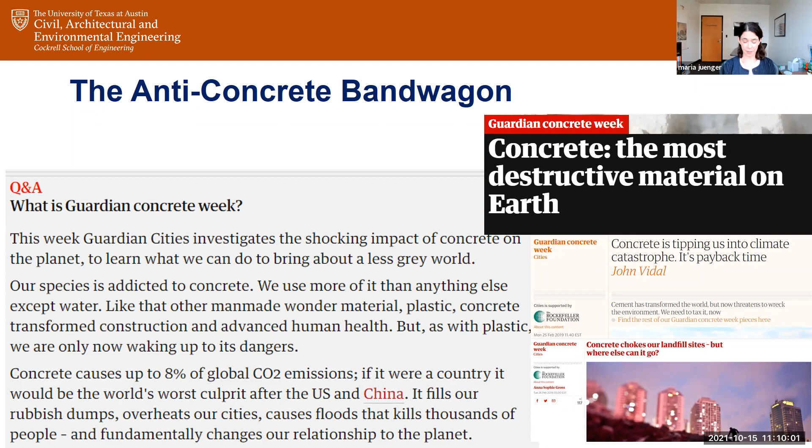And so I wanted to put that in context about the approach that he has. He's not the enemy of concrete. He is a supporter of concrete, coming from that perspective.

Microsoft is going carbon negative. Carbon neutral isn't enough for them. In conversations with the Portland Cement Association and Global Cement and Concrete Association, they will soon follow with these targets about carbon neutrality or carbon negativity. It's something that's coming, it's trendy, and everybody's jumping on this, I would say, positive bandwagon rather than a negative bandwagon.

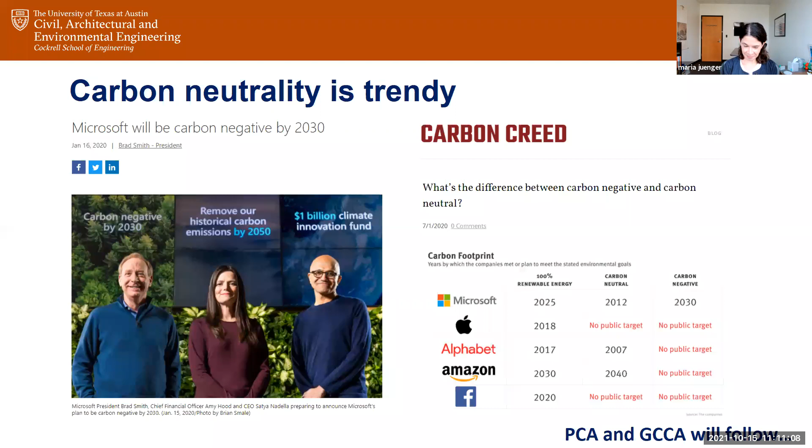I'm going to throw some statistics at you because I think they're fun. Many of you have seen these statistics before. Whenever I go into a talk that's about cement and concrete, people throw the same numbers at me and I say, oh yeah, I already know this, just keep going. But I'm throwing them at you because I'm picking the ones that I think are the most interesting and showing you those. So a lot of people talk about the amount of cement and concrete used globally.

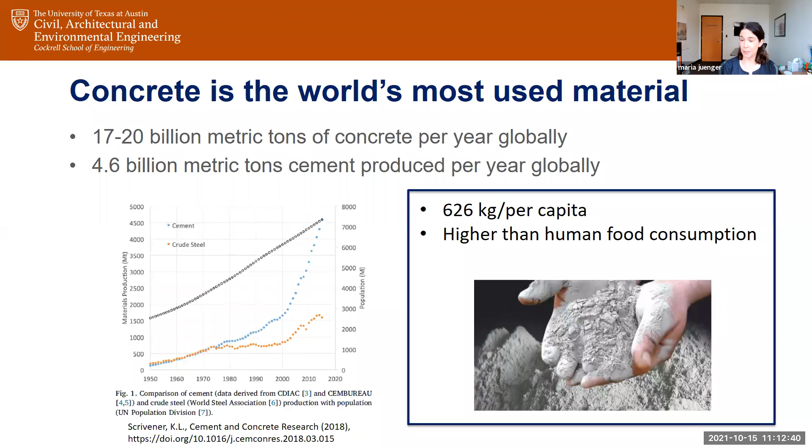So not only is it outpacing our population growth, we're actually making more cement than food. It'd be great if we could eat cement, but no, that's the one thing you can't do with it. You can make clothes, you can make buildings, you can make whatever you want, you just can't eat it.

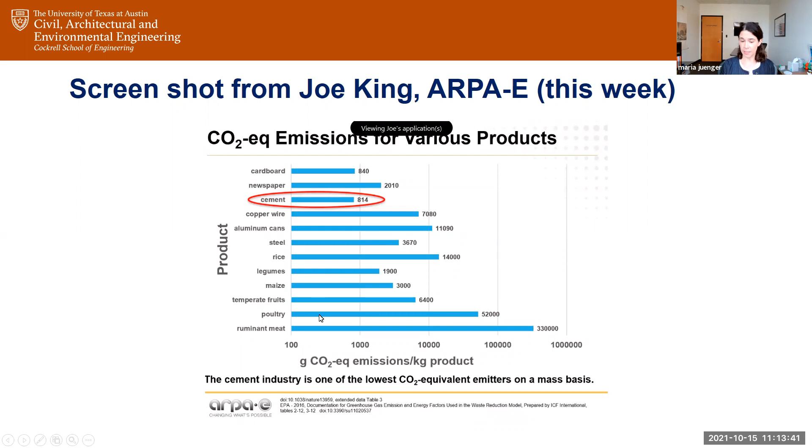It's carbon emissions, CO2 emissions for various products with cement circled. But what I think is interesting about this is on a per kilogram basis, food actually produces more CO2 than cement. We just make more cement than food. So the reason it's a target of this anti-concrete bandwagon is because we make more of it than we make food. But red meat, poultry, even some of the produce is producing more CO2 per kilogram than cement does. So I found that interesting, and so I stole it.

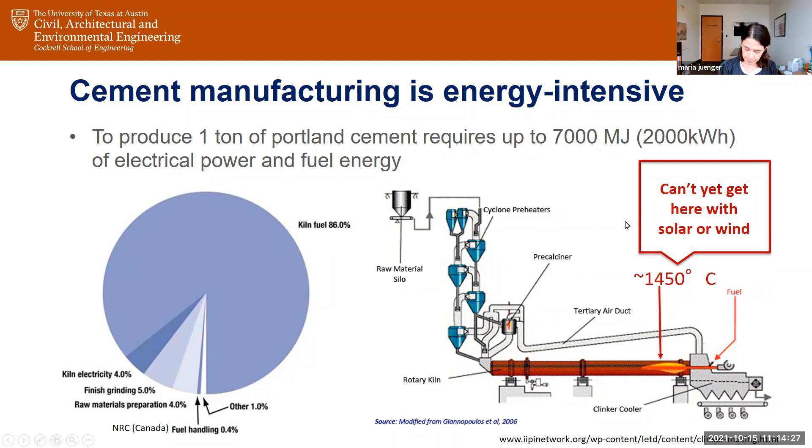Another statistic that people like to throw around, and I love this one, is that if the cement industry were a country, it would be the third largest emitter in the world behind China and the US. More than aviation fuel, not far behind global agriculture. I love that. I also tell people that Texas, if it were a country, would have one of the top 10 GDPs in the world, ahead of Canada and Korea. So in terms of context, these types of numbers ranking countries have a high impact, right? So it would be like a country.

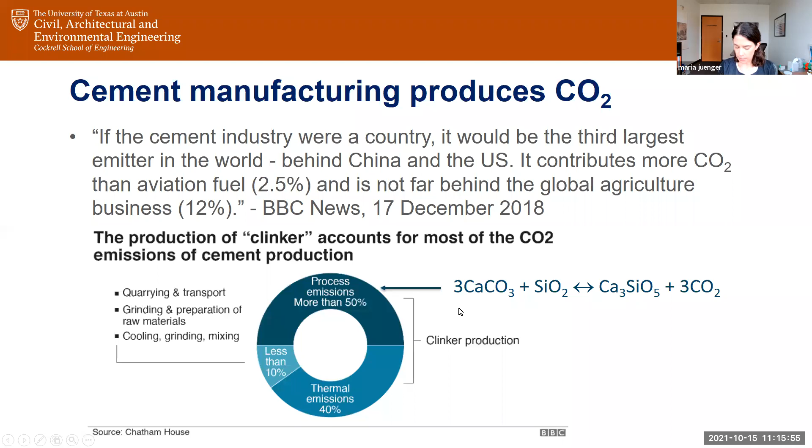The interesting thing about that is part of this equation is thermal emissions, which come from burning fossil fuels. But we have another problem: process emissions, or what I prefer to call chemical emissions, that happen when we put limestone, which is calcium carbonate, into our cement kilns. We release CO2 in that process, and we need that calcium carbonate because we need chemical phases like C3S, the Ca3SiO5, in our cement to make it react with water and gain strength. But CO2 is a byproduct of that chemical process that is hard to get rid of. So we're getting bad CO2 from the burning of fossil fuels and from the chemistry of the system. There are two approaches or two problems there.

The first lever is just making things more efficient. Can you change the equipment in the cement plant and make it more efficient? The second one is, can we use alternative fuels? Do we have to be burning fossil fuels, or can we use something else? And I'm dividing that into equipment, because if you're burning something else, you need different equipment to burn it.

And you also need to change your manufacturing process. So I'm defining it as equipment changes and the way you manufacture and process the system.

The third has to do with the chemistry of the system, what we call clinker substitution. Clinker is what comes out of the cement kiln. If we substitute that cement with something else, we can reduce CO2 emissions because we're using less cement. So really this is a material change. We can substitute it with either a completely alternative cement, or with what we call a supplementary cementitious material, which is a partial substitute of cement. That's a material change, changing the chemistry of the system altogether to reduce cement use.

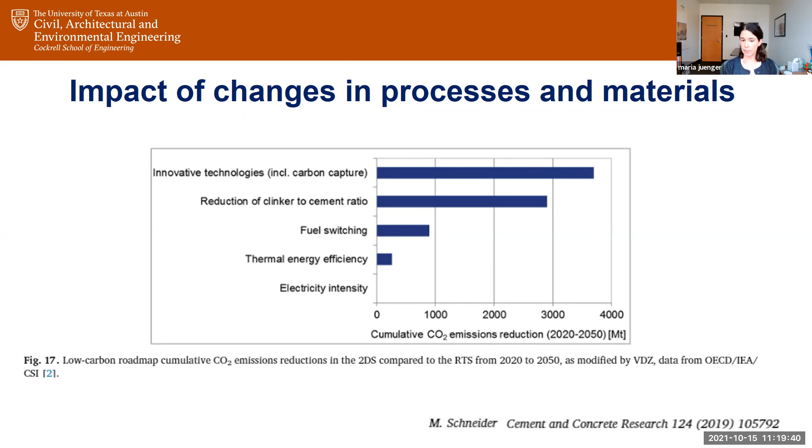In those original topics, one reason Bill Gates focuses on carbon capture is because it actually has some of the most power to reduce CO2 emissions from the industry. Innovative technologies, including carbon capture, can cumulatively reduce millions of tons of CO2 from the cement industry. Clinker reduction is the second best option for removing CO2 by pure volume or mass reduction. Switching to alternative fuels is next, and then thermal and energy efficiency and other electric changes are lower, but really small compared to the others.

In this particular talk, I'm going to focus on the middle three topics. Thermal and electric efficiency is useful, but has a really small impact. Efficiency of material use is really, really useful, but it's outside the scope of what I'm going to talk about here. I'm going to talk about the middle three, which have the most power to change our industry.

The one in bold is the one I'm going to talk about the most, and I'll tell you why. Not just because it's my favorite, but because if we think about what we have the power to do as civil engineers, I talk about this quite a bit in my classes when we discuss steel versus concrete. When I teach my undergraduate students about steel, I tell them steel is great and here's how it works. I tell you this so that when you design something made out of steel, you make a good and reasonable choice of which steel to use, but you do not make the steel.

On the other hand, concrete, civil engineers design and make the concrete. It's our job to design and make concrete. It is not our job to make steel. The metallurgists make the steel, we use it.

The same thing is true when you look at these levers. From an alternative fuel perspective, this isn't really a topic that falls under the purview of civil engineers. It's much more of an industrial, mechanical, chemical engineer type thing—it's about changing the fuel you burn in a process. So I'll talk about it, but it's not something we really can do research on. We can do research on the impact on the material after it's been done, but not on the fuel changing itself. The same applies to certain parts of the carbon capture and storage equation. Civil engineers use the material that comes out.

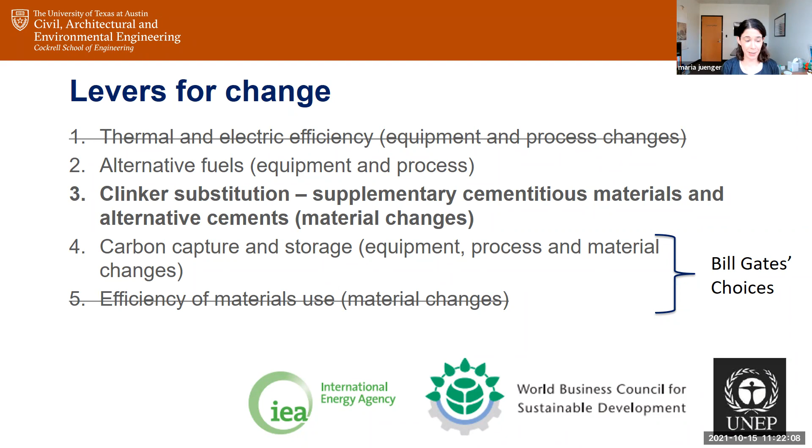So this is in bold, not just because I like it and do research in this area, but this is the one topic that we have the most power over, and five. But again, I don't have a lot to say in that area of my own work, so that's why I'm not talking about it.

Okay, so let's talk briefly about alternative fuels, just so you have a good sense of what's happening here and what people mean. In terms of alternative fuels, people generally burn coal, oil, or gas to fire the cement kiln to that 1450-ish temperature that's necessary. There's a lot of other materials you can use: sewage sludge, animal bone meal, used tires, solvents, plastics. There's a lot of waste materials people are burning, but if you look at this entire list, all of it is still burning, which means there's still emissions associated with it.

They may be byproducts of other industries, but they're still burning. One of the things I want to mention is you are changing the equation with respect to CO2 emissions for sure, but there are side effects of this. I mentioned I can't study what's going to happen in a cement plant to the temperature when you burn a different fuel. But for example, for many years, this concept of animal bone meal, people have been using animal bone meal in cement kilns and burning this waste animal product for decades.

One of the things they noticed pretty early on, which was really interesting, is that when you burn any waste - but in the particular original studies, when you burned bone meal - there was a lot of phosphorus in the bone meal that would be released from the burning and get into the cement itself. So we can't study what the materials are that you would burn, but we can understand the impact of burning that material on the cement itself and how that affects its performance. Because of the way the system is designed in a cement kiln, particulate matter can rise up from the combustion chamber and mix itself in with the cement, which is interesting.

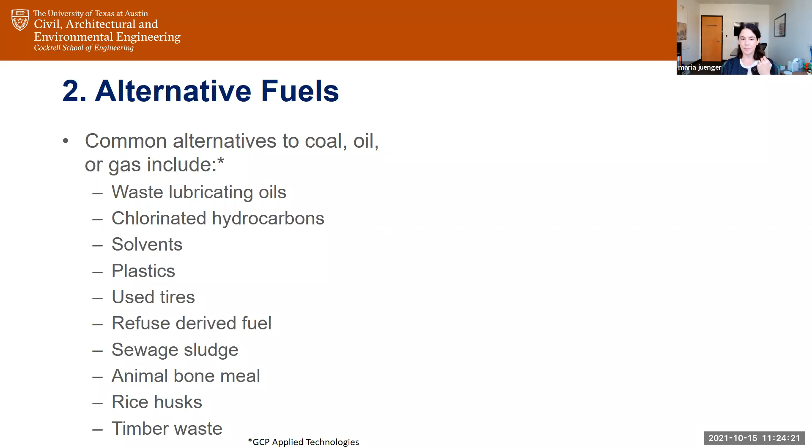So also, in January this past year, 2021, I was preparing another talk and I was looking at these types of concepts and I did a bunch of Google searches. And you know how I said you can't really use solar or wind, it doesn't have high enough energy? Turns out people are actually looking at this, which is super, super cool. There may be ways to actually take advantage of solar energy and these solar fuel technologies to actually produce enough heat to fire a cement kiln. CEMEX, in a press release from 2020, is saying that they're looking into this. So it may be possible, just not with the technology that we commonly have and commonly use today.

About a month ago, we installed solar panels on our roof. I'm telling you, those solar panels will charge our electric cars and run our excessive air conditioning that we use in Austin, Texas. They're doing a really good job at that. But they are completely not capable, not the right technology to take a cement kiln to 1450 degrees. We're not there yet.

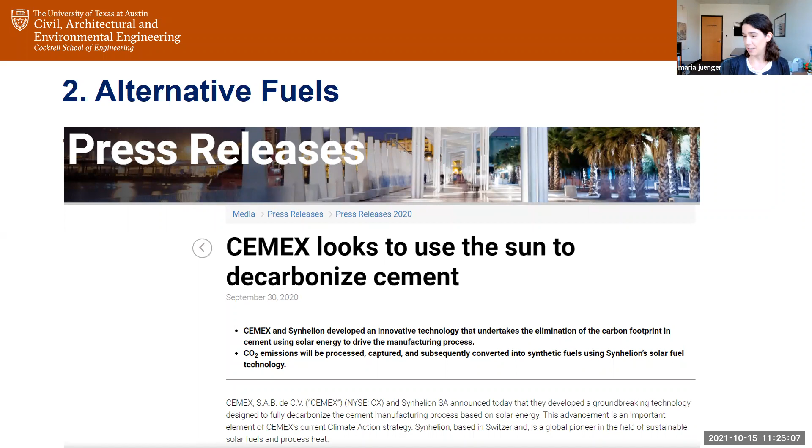Okay, let's talk about - I'm going to dive a little deeply now into this concept of clinker substitution, since this is the area that many of us work on in concrete materials. So I'm dividing clinker substitution into two different types of concepts. There's a concept of still using Portland cement, but replacing a portion of it so you use less of it. And then there's a concept of forgetting Portland cement, using something else entirely. So what we're calling these is 3A, since we had 1, 2, 3, 4, 5 levers. This is lever number 3.

3A is clinker substitution using a supplementary cementitious material, and that's the technical term for it. And then we'll talk about 3B, which is get rid of, don't use Portland cement, use something else entirely - so basically 100% clinker substitution. In this case, we're talking about 10, 20, 30, 40, 50% of the cement being replaced. Okay, so admittedly, using supplementary cementitious materials is not a new idea.

This has been done for decades, and more than 60% of ready-mix concrete in the US already uses this. So in terms of impact on how we make and produce our concrete and how it performs, this is already part of our strategy. Originally, it was a strategy to reduce cost and improve concrete durability, but now people are targeting the impact on sustainability. So this strategy isn't new, it's already being used. The research challenges are multiple, but one is that the supply chain is changing rapidly for these types of materials.

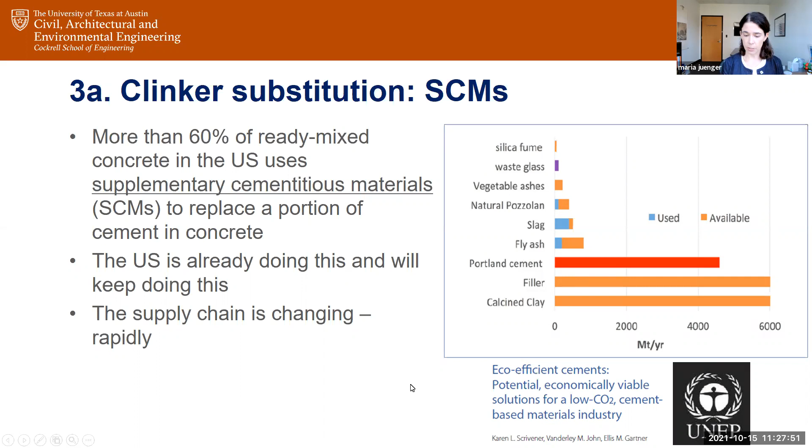The question then becomes, can we push it even further down the line? Can we start using gypsum? Can we start using asphalt? Can we start using other things? The answer is you have to use something that is chemically compatible with the system and gives you the performance you want. You're trying not to just dilute your cement - that's easy enough to do. You can dilute cement with anything.

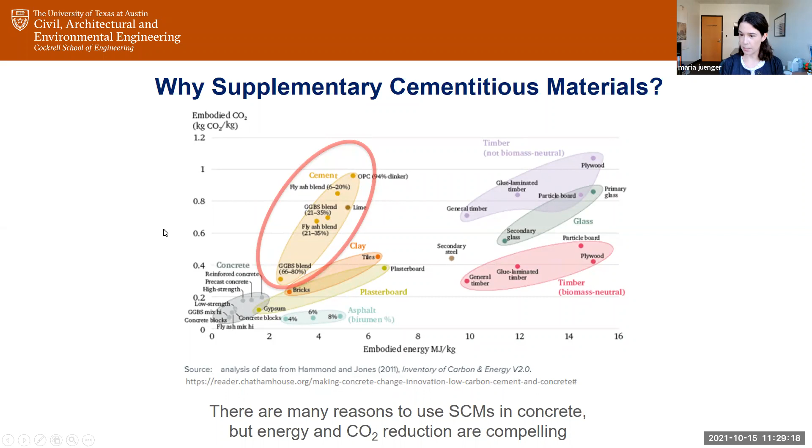You can dilute the cement with anything. What we're doing here is trying to put something into our system that's actually chemically reactive, so that we improve the properties of our system, or at least keep the status quo. So we can't just look at anything - so what are we looking for?

In terms of what we're looking for, there are several qualities. We want a material that's primarily glassy, that either comes as a fine powder from its source or can be ground into a fine powder - so it kind of looks like cement. And from a chemical perspective, we want something with a high silica content and alumina content. We want it to have a high surface area so it can dissolve in our cementitious pore solution, so we want it to be fine and have a high surface area. We also want it to have a high amorphous content so that it can dissolve in our cement pore solution as well - we want something that's soluble, that will be reactive.

The reason we want this is we want it to react in what we call the pozzolanic reaction with calcium hydroxide formed from our Portland cement, so that it forms this calcium silicate hydrate phase, which gives us strength and durability in our concrete. And we want all of this at a low cost. So we want everything - and the question is, how do we get that? We want everything, and we also want it to be low energy, low CO2. So it's a lot to ask for in a material.

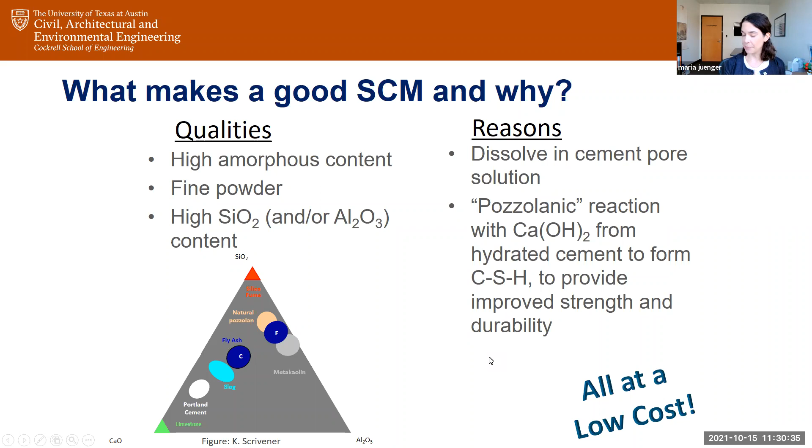Historically, in the US in particular, fly ash met all of those criteria. Fly ash is a byproduct from burning coal for power, so it met all of those criteria. It was an amorphous material, mostly glassy, high in silica and alumina. It already came as a fine powder, you didn't need to grind it. It was a byproduct from another industry, so in terms of embodied CO2 and embodied energy, it was doing pretty well from that.

If we want to get from 60% of our concrete uses supplementary cementitious materials to 100%, and we want to use more of it, we need to look for and identify other materials that meet those needs. What I would say is, in this search, what we're looking for is performance. How good is the material? And what I will say is, we don't need it to be great, we need it to be just good enough. I'll get back to that.

Cost. We're not looking for something at this point in the technical market that's super cheap. Fly ash was cheap because it was a waste product historically. We're looking for something that is more or less the cost of cement, maybe slightly higher, slightly lower, but at least it's going to be cheaper than carbon capture. So we need to kind of temper our expectations for these types of materials.

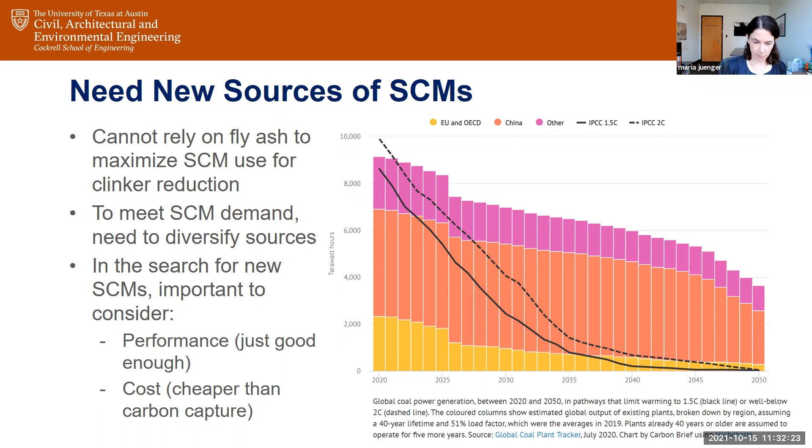One of the really good candidates of materials that we can use as supplementary cementitious materials are natural pozzolans. These are volcanic materials like pumice and perlite, volcanic ashes, zeolites, similar in many ways to what the Romans used in their concrete mixtures. And then sedimentary pozzolans, so calcined clays and shales that don't simply have to be quarried, but need to be heated, or what we call calcined, at a high temperature in addition to being quarried.

One of the interesting things about these materials is that, whereas fly ash is decreasing in availability, the current commercial availability of these natural pozzolans is actually increasing. But because you need, in many cases, a volcano somewhere nearby geographically to have deposited the volcanic minerals, they can be really limited geographically, but not in all cases.

What I'm particularly interested in looking at, and we're going to talk about some case studies, is how can we take these materials that inherently have lower CO2 and embodied energy than Portland cement because they're simply quarried or heated to a lower temperature, and combine them with our interest in using waste products like we did for fly ash as well. Then how can we blend them and optimize them to make them meet our expectations in terms of having a relatively low cost and just good enough performance? So I'm going to talk about that with a few case studies.

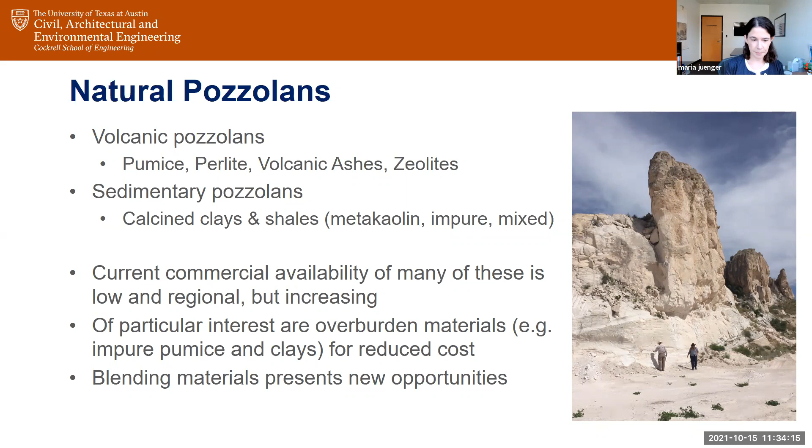So when we're looking at finding supplementary cementitious materials, our gold standard is fly ash. But what's great about having fly ash as a gold standard is it's not actually a great material, it's kind of a mediocre performer. In terms of reactivity, it's only 20 to 40% reactive. The reactivity compared to many other materials we're interested in as supplementary cementitious materials is more or less average to low.

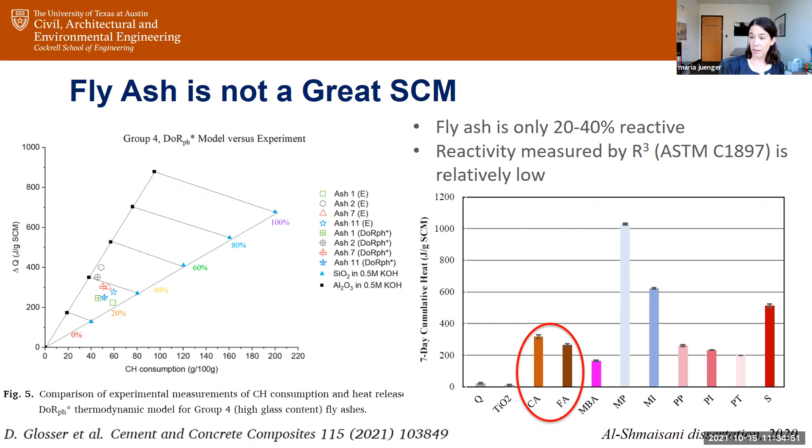So when we're talking about a substitute for something, at least we're not aiming really high. We're aiming for something that's relatively mediocre, which is good to know. If we're assuming fly ash is a reference SCM, we don't really need great performance, we need just good enough performance. Actually, it's better for reducing the amount of cement in your system to use a high amount of mediocre material than a very small amount of really good material. So in terms of balancing and materials design, it makes a lot of sense.

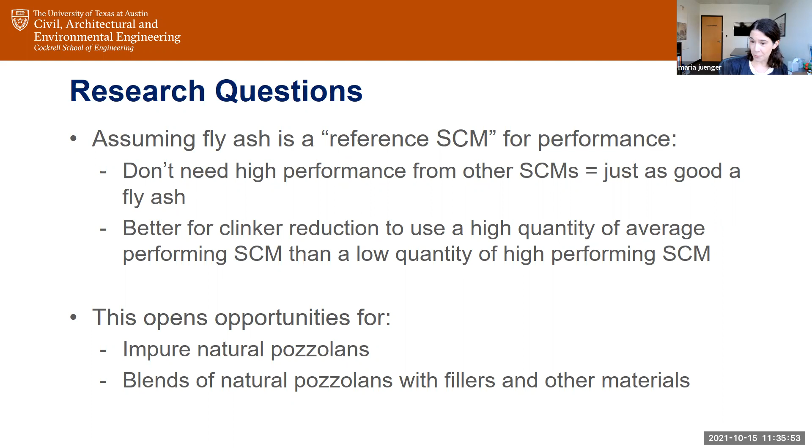This opens up opportunities for using what we would say less desirable natural pozzolans, or blends of materials, to target a performance and cost perspective. So designing the system to be average. It's really counterintuitive, you usually want to design something to be optimal. We want to design it so that we can use it cheaply, abundantly, and get okay performance out of it. So the first example I want to give of a case study here is what I would call impure pumice.

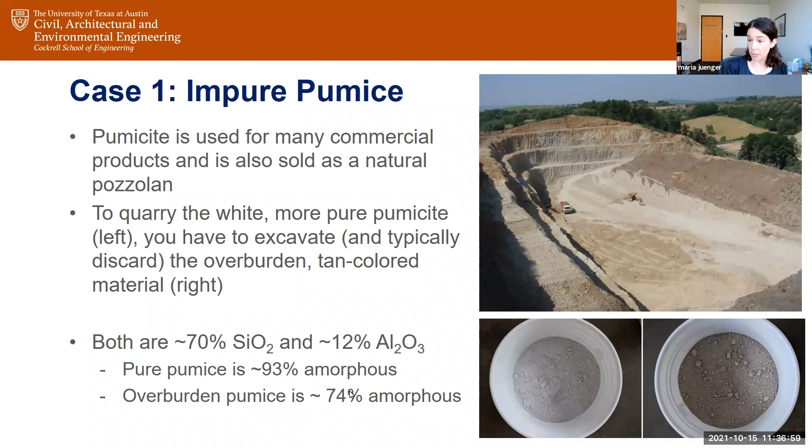The pure pumice is really amorphous, the overburden pumice is less so, the tan pumice is less so. What we're interested in knowing for the concrete industry is whether the tan pumice, the stuff they're really just throwing away, can we use that? Can we use your garbage and get just as good of performance, or close enough, to the more pure material that you're selling to other industries? The answer is, I'm going to show you a couple of quick examples of data.

This particular test is a reactivity test now standardized in ASTM C1897, called the R3 test. In this plot, which I'll show a few times with different circles looking at different materials: if we look at something inert, like quartz or titanium dioxide, this value is low. If we look at fly ash, this value is medium. If we look at pumice, the pure pumice (PP) or the impure pumice (PI), this overburden pumice, their reactivity in this test is about the same as fly ash. So they both actually meet our goal of being just as good as fly ash, and yet the impure one is a waste product, just like fly ash as well.

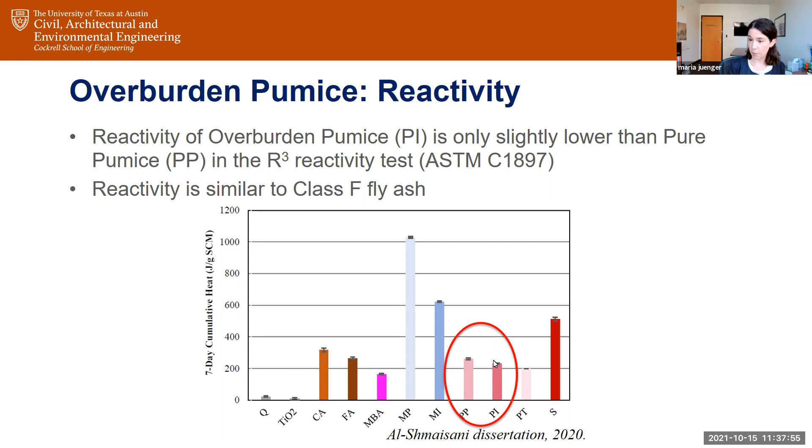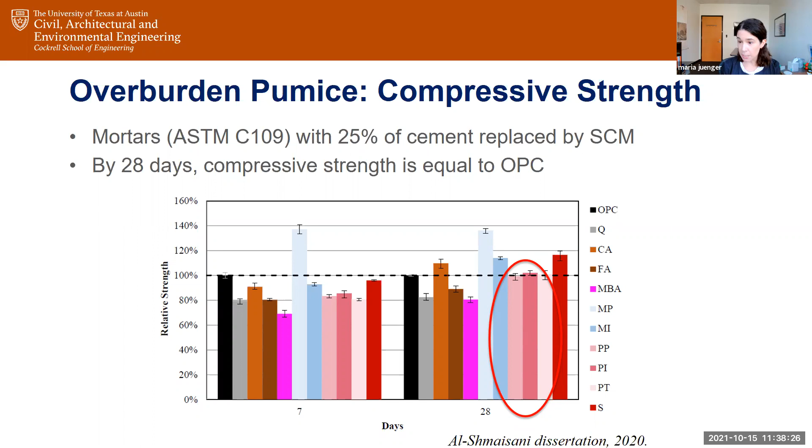In terms of compressive strength, another metric people are interested in, these are 28-day strength values. This black one is at 100% relative strength compared to Portland cement. These overburden pumice materials have the same compressive strength as Portland cement. So in terms of being able to replace fly ash with this, and make concrete with this, it's a good material — you don't need to use the more pure one.

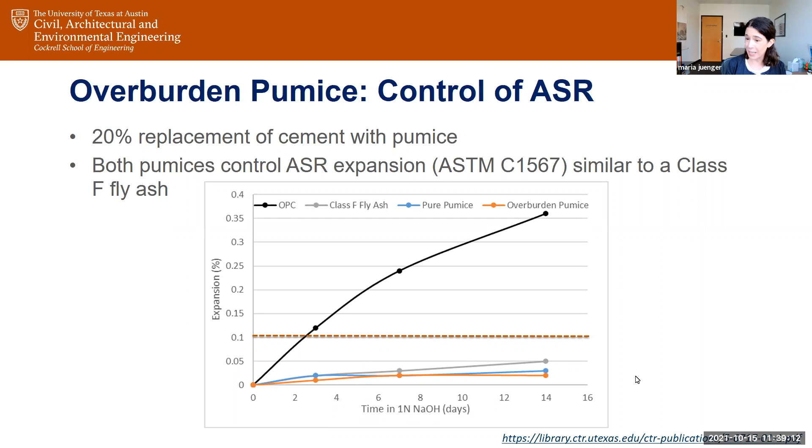Another example of what people look for in supplementary cementitious materials is how they help concrete durability. In this example, for alkali silica reaction, a reaction that causes expansion and cracking in concrete, with Portland cement alone you get high expansion over time on your y-axis. But when you replace Portland cement with pumice or fly ash, they all reduce expansion. The pumices perform quite similarly to the fly ash, even the overburden material. This proves the concrete industry can take the rejects from other industries quite easily and doesn't have to use their more pure products.

Another similar example is clay. Clay is abundant around the world, and typically in concrete mixtures we've used a very purified form of kaolinite clay that's been heated, called metakaolin. We typically use it in really small amounts because it negatively impacts workability and can have a really high cost. But there's increased interest in using clays at greater amounts as substitutes for fly ash, in which case you can start looking at clays that are less pure and what the impacts of those materials are in the system.

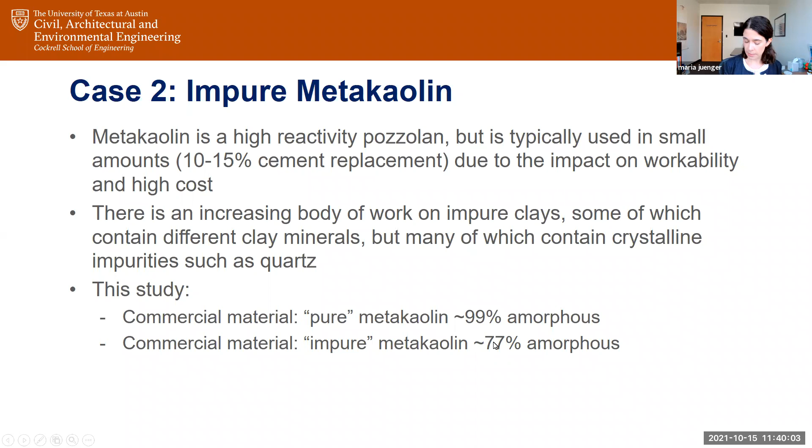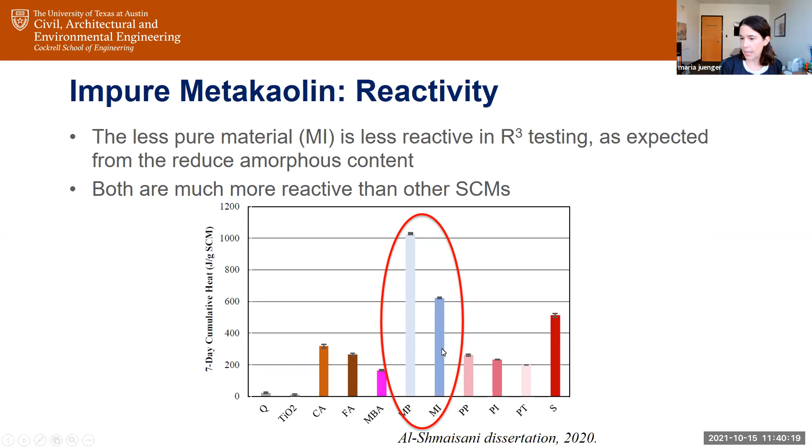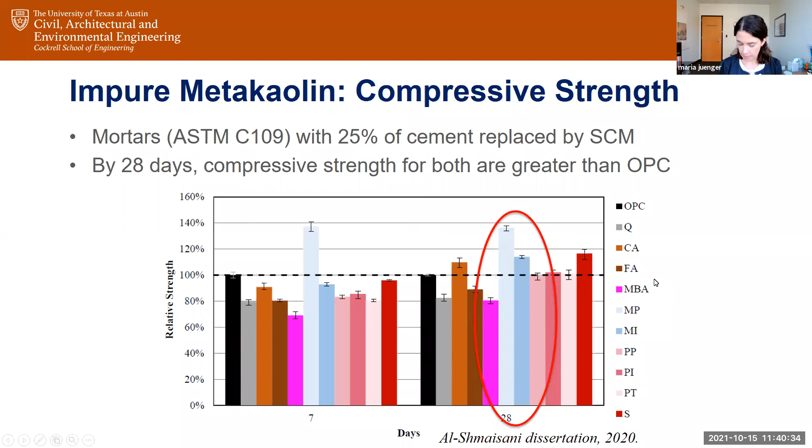In this study, we're comparing a really pure metakaolin clay, 99%, with one that's more like 77% amorphous and has contaminants in it. If we look at reactivity, both are significantly higher than the fly ash. The reactivity of the less pure material is lower than the really good one, but since it's still better than the fly ash, it's suitable for our concrete mixtures. In terms of compressive strength, the strength is great as well. Reducing the quality doesn't necessarily make it a worse product for our concrete mixtures, and in some cases could actually make it better. One of the problems with metakaolin is that, as I mentioned, you use it in really small amounts because it's really expensive and it really increases the water demand of the concrete mixture.

So it makes it really stiff and hard to mix, and sticky, so people use it in really small amounts, let's say 10%. What we found is that when you use a less pure calcined clay, you can get workability similar to other pozzolans.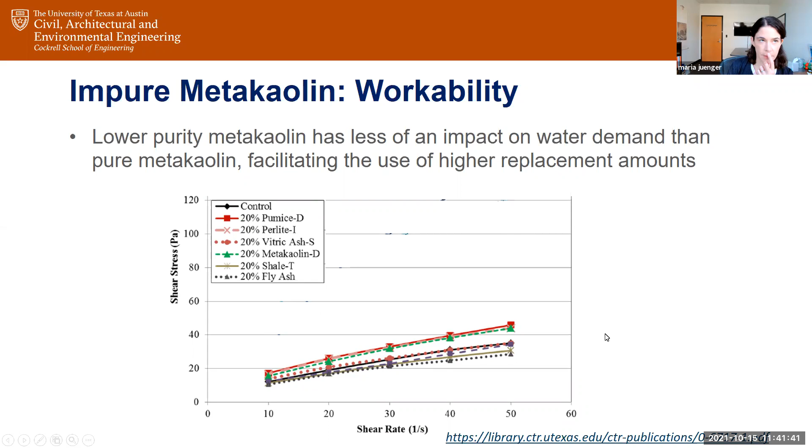In this particular example, these are rheology plots of shear stress versus shear rate, where the slope gives you some indication of viscosity. The black line is just a Portland cement mixture, and the metakaolin is this green one, which has a slightly higher viscosity, but still within what's reasonable for a concrete mixture. Whereas pure metakaolin, which I don't have on this plot but we do have data for, is a much, much lower viscosity mixture. Sorry, lower viscosity, higher—I always get mixed up with that. I have to think about syrup.

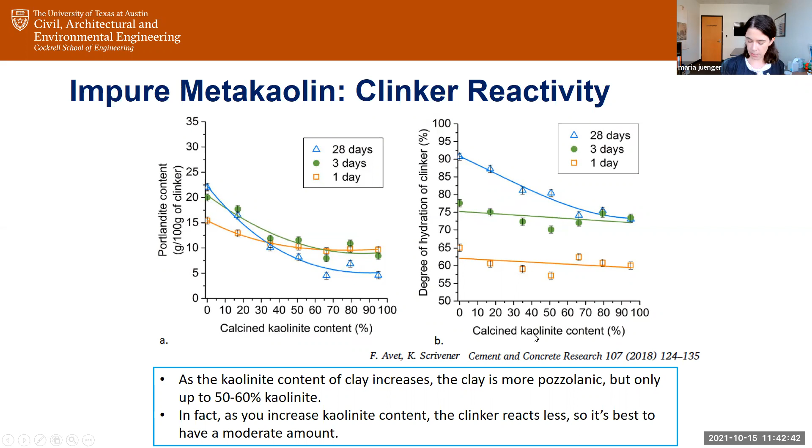The other thing that's interesting is if you start using these less pure materials—again, this is counterintuitive, you think you want to use the best—but there's so much literature and data out there that says let's aim for mediocre. This is an example from a study in Switzerland from 2018 that basically says as you increase the kaolinite content of a calcined clay, so you increase that amorphous content effectively, you actually decrease the reactivity of the cement itself. So they're competing. So really what you want is a calcined clay that's about 50 to 60% amorphous, or 50 to 60% kaolinite, because you can get the optimal reactivity of your Portland cement and yet use a cheaper, better, just as good for your properties calcined clay. So there's a lot of really interesting material optimization happening here.

Okay, my third case study, which is pretty short I promise, is kind of a case study in 'be careful what you ask for.'

We really are interested in looking at byproduct materials for our supplementary cementitious materials because we want things that are low cost. An example of this in the US: most of the shingles used on roofs are these asphalt composite shingles, where you have an asphalt binder and really uniformly graded small aggregate blended with this asphalt binder, put on a sheet of paper and tacked onto the roof. In Miami you might have more clay tile roofs and it might be much nicer, but the rest of us end up with these composite asphalt shingles.

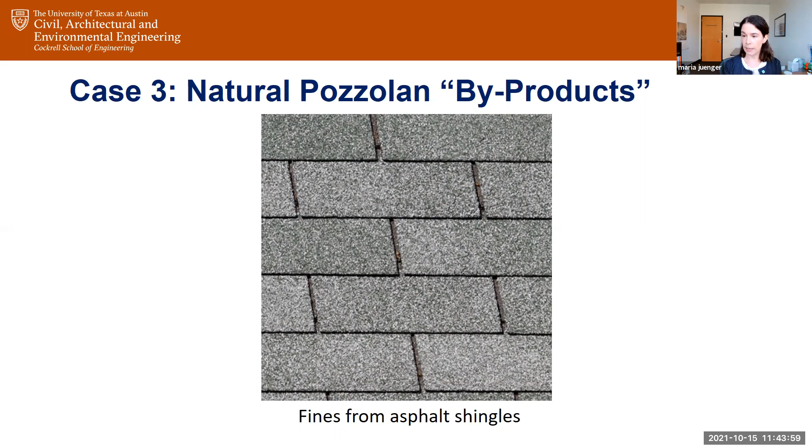These fines are interesting. Like we know from making concrete aggregates, if we're quarrying, say, a limestone aggregate, we know we have to quarry it and crush it, and in the process of crushing we end up with a lot of fine material that we consider waste. Same for this process—they're looking for a specific particle size range, so anything smaller than that is a waste byproduct of their industry. What's interesting is some of those particular aggregates have silica and alumina in them, so they could presumably be really good supplementary cementitious materials.

If you start looking at the 28-day strength of, in this case, a mortar made with these materials—this black one here is the Portland cement. These materials NM1, 2, 3, and 4 are the byproduct asphalt shingle aggregates, ground very fine in the same particle size as Portland cement. The P1 and P2 here are actually the pumices we looked at earlier. If you look at the 28-day strength, they look great—you think, oh, we've got a really great source of supplementary cementitious materials as a byproduct of these industries. It seems to not affect 28-day strength at all.

However, if you start looking at later strengths, it tells another story and starts to raise suspicion. If you look at the Portland cement, you have a 90-day strength here of a little over 6,000 PSI, let's say 42 megapascals, and the pure pumice is even higher. The impure pumice is the same as the Portland cement, but you start looking at these others and they never caught up. So it starts to raise suspicion—they're not behaving like the pumices, they're not behaving like a supplementary cementitious material, they're behaving a lot more like the inert quartz. So the question is, why?

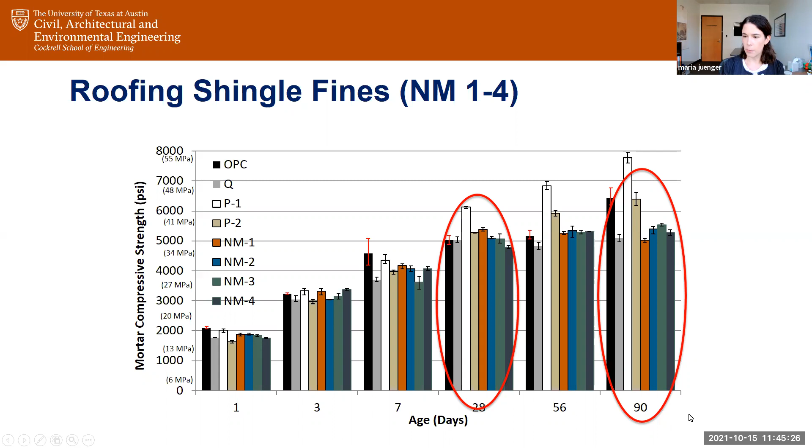If we look at reactivity tests, this ASTM C1897 R3-type test starts to tell some interesting stories. We have a quartz, which is pretty low reactivity in this test method, which it should be. We have the pumices, and then we have these other minerals, which are kind of low on this scale.

They're not as low as the quartz, but they're pretty low. So you start to say, well, what is it with these materials? They're fine grained, they have silica and alumina. What's the other part that we need?

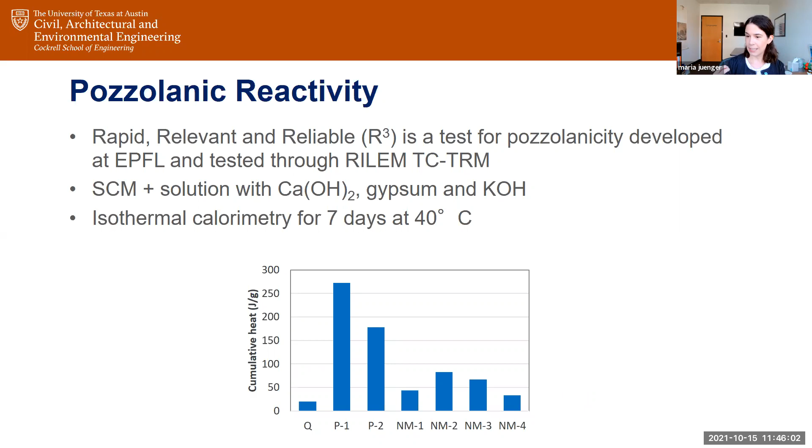The other part we need is for them to be soluble, we need them to be glassy. If you look at the X-ray diffraction data from these roofing shingles, if you have a pumice, you see this little glassy hump. So you have some crystalline phases, but that hump indicates amorphous material. In these roofing shingles, there's no amorphous hump, there's no glass. So we have to be careful looking at these data and materials to really make sure all our criteria are satisfied.

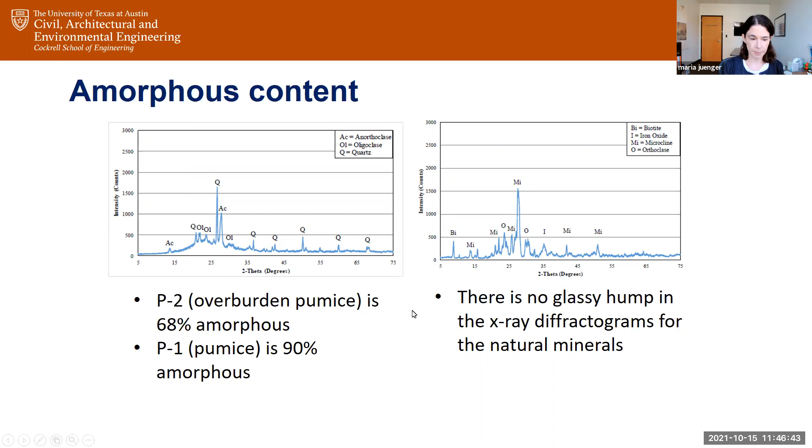They have to be amorphous or at least soluble, fine-grained, have silica and alumina, and they have to be reactive. So we have to be a little careful in our search as well. So that's my warning sign.

Okay, I'm going to move on and talk about clinker substitution and carbon sequestration quickly. I used to do a lot of work on alternative cements. It was a lot of fun, it was great to do research on these. I did quite a bit of work on calcium sulfoaluminate belite cements. I'm still doing some work on geopolymers, which are alkali activated fly ashes and other materials. And there are many other systems that are magnesium based and otherwise.

I included this picture on the right because most of the work I do is really small, it's chemistry, everything's in the lab. We actually made this geopolymer bench for a hotel as a project for a construction company, an alkali activated fly ash bench, and we were really excited about it. Then they showed us a picture of it in place, and it looks like they put it in the smoking area near the exit of the hotel. I need to go look for it, I don't even know if it's still there. It was really kind of sad, but that's the biggest thing I've ever made out of alkali activated material.

Right now we're focusing our alkali activated material work on oil well cements because they actually work really well in some of those applications. So I'm still working on those systems in that context.

I do want to point out that companies are still working on these alternative cements. For example, Cemex made a press announcement in 2020 about using a geopolymer system and selling it commercially. So this is still a direction many companies are working in.

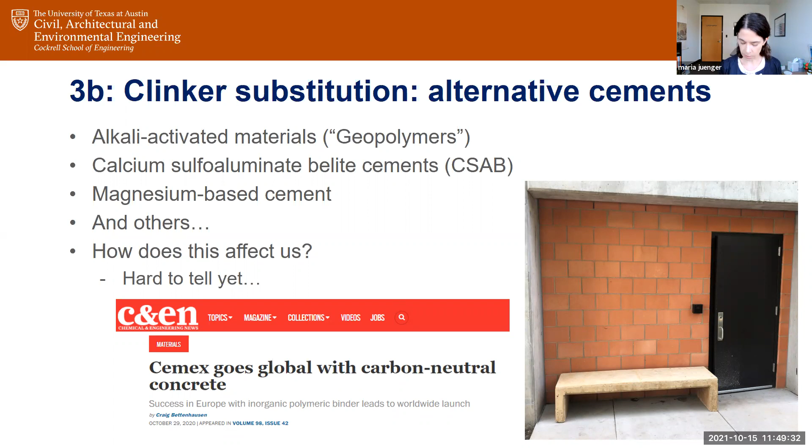So I think they're a really good area to be doing research in. I think your perspective has to be long-term, or at least either smaller projects or long-term. We'll get there in terms of wider spread implementation, but it's a much longer path to get there.

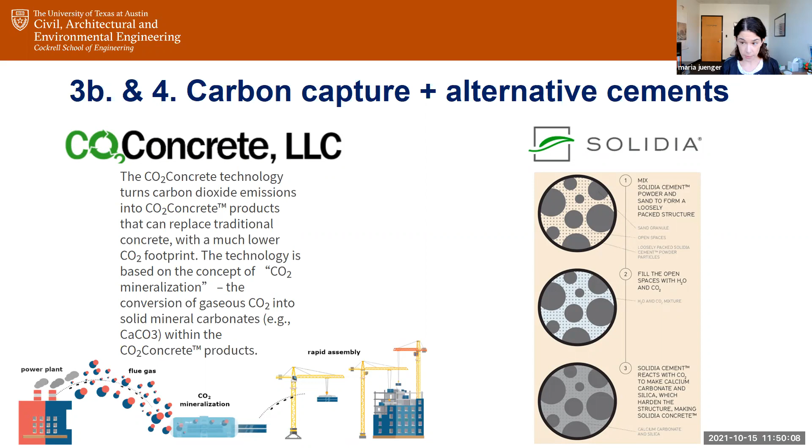But most people, including Bill Gates—you thought I lost the Bill Gates thread, but I'm back—most people, including Bill Gates, when they think about carbon sequestration and carbon capture, they're thinking about technologies that happen in the industrial process. And the cement industry is actually doing some of this already.

So there are pilot plants in Norway, Taiwan, and in the EU that are actually changing the way their cement plants work to actually capture CO2 and put it in solution, or create limestone or something from that as well. These are three examples you can look up and get more details on, but it's happening. It's a process that's gone from design to actual pilot scale and could potentially go into large scale implementation.

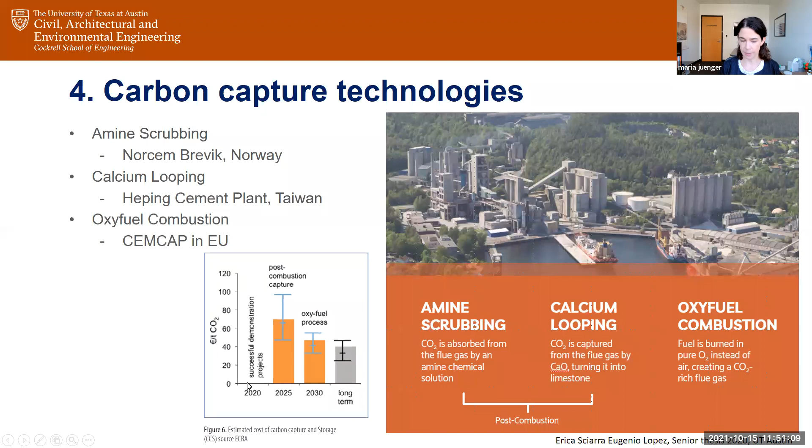It's changing a cement plant to operate in a different way. If we look at implementing carbon capture in cement, we're doubling or tripling the price of cement. Somebody's got to have to pay for this, right?

Bill Gates argues that the cost of cement is going to go up, but it gets passed on to companies, not individual consumers, since it's used by larger scale companies or organizations rather than consumers. I would argue it gets passed on to the consumer anyway through higher taxes and other things. So somebody's going to have to pay for this.

He thinks it has to come from government subsidies or other types of policies and incentives, and argues that it's not about making a choice of buying cement number one that's cheaper and emits CO2, or cement number two that's more expensive and has used carbon capture—he argues everybody has to sell the same product and everybody has to use carbon capture. I believe that's where the industry is going to go, that it's going to be an all or nothing thing. It may not hit the US for quite a while, but it's going to hit Europe first and other countries that are more engaged in reducing CO2 emissions, but the technologies, once developed, are going to become widespread.

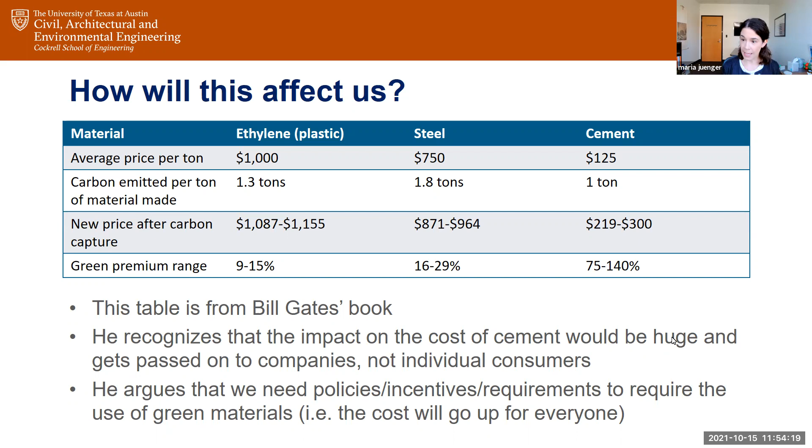So it's incredibly powerful—we're just going to have to pay more for it. I would say at the end of reading Bill Gates's chapter, I was a convert. I became a convert to carbon capture and to spending more of our industry's direction on this, as well as supplementary cementitious materials, because it gives us the power to do something right now and let the other more advanced technologies catch up.

So, in conclusion, we really need to use cement and concrete. They're really important for the development of civilizations in the world, right? We can't just stop building and repairing infrastructure, and Bill Gates agrees with that. We need to use supplementary cementitious materials, lower the cementitious material content in concrete, design structures more efficiently to use less concrete, and then use carbon capture in the very near future, and alternative cements and fuels as those technologies develop.

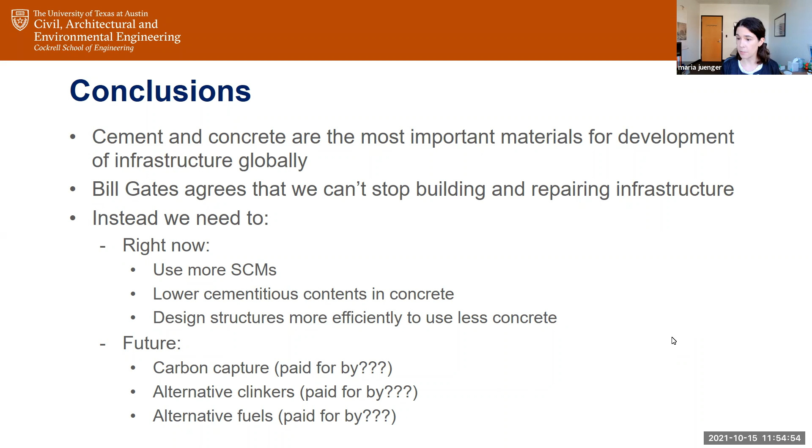So I want to thank you for your attention, and I will definitely take questions.